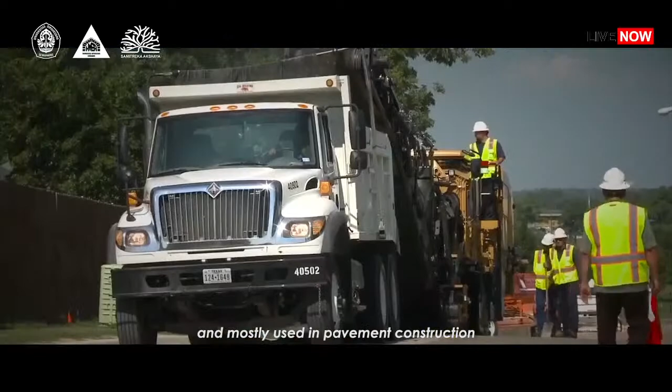Every industry has been touched by COVID-19 impact. This pandemic being challenged especially while constructing. As we know, asphalt closely related with construction industry and mostly used in pavement construction. Currently, there's a lot of technologies that we can take advantage of. The asphalt using in pavement construction has a lot of innovation and development to have less of an impact on environment.

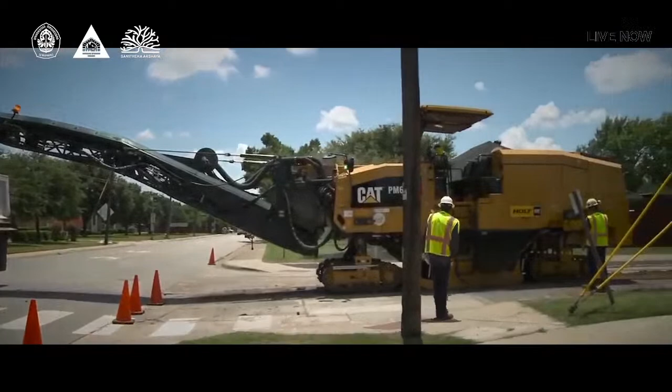To learn from you, Dr. Izzi. In fact, I would like to apologize as well because I can only stay for about 1.5 hours and then I leave because I need to attend an event later on. So I may disappear earlier before the end. How are you over there?

Alhamdulillah, everything's fine here. Okay, Madam Rita Susanti, can you hear us? Or can you check your audio? Okay, hello, Mr. Hasan. Yes. Selamat petang, Dr. Yusuf, Dr. Izzi.

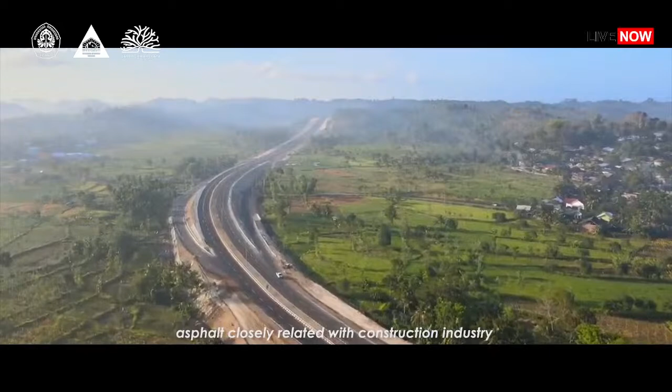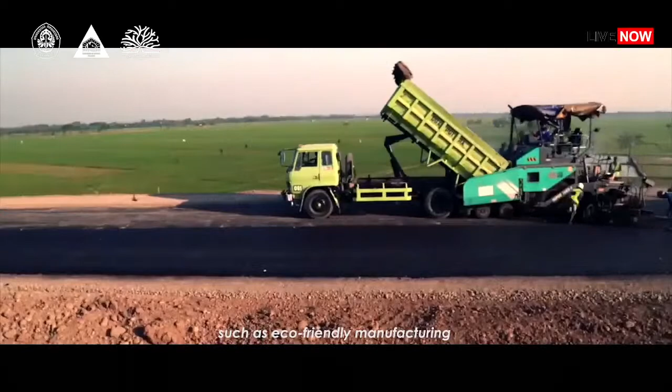Good morning. Every industry has been touched by COVID-19 impact. This pandemic being challenged especially while constructing. As we know, asphalt closely related with construction industry and mostly used in pavement construction. Currently, there's a lot of technologies that we can take advantage of. The asphalt using in pavement construction has a lot of innovation and development such as eco-friendly manufacturing, which being developed to have less of an impact on environment.

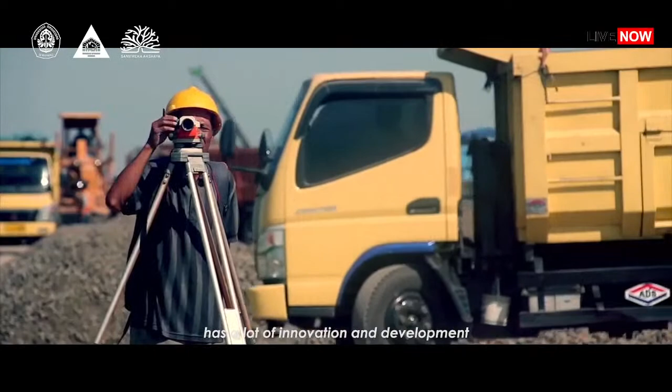Every industry has been touched by COVID-19 impact. This pandemic being challenged especially while constructing. As we know, asphalt closely related with construction industry and mostly used in pavement construction.

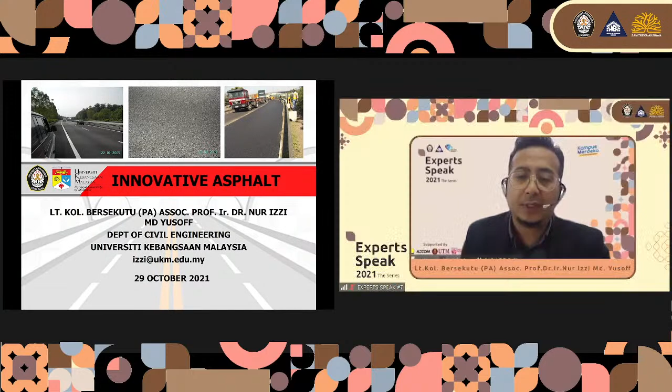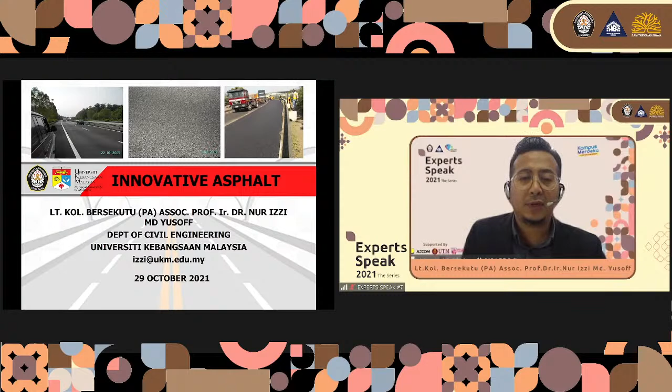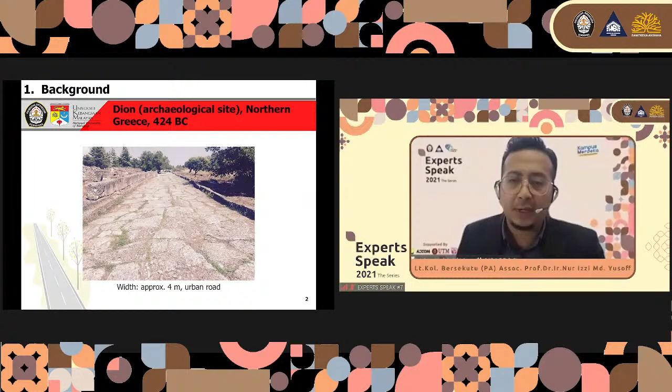Next, we also have another ancient road called the Via Egnatia, a road constructed by the Romans in the 2nd century BC.

It crossed Illyricum, Macedonia, and Thracia, running through territory that is now part of modern Albania, North Macedonia, Greece, and European Turkey as a continuation of the Via Appia. Like other major Roman roads, it was about 3 meters wide in rural areas and 5 meters wide near cities or urban areas. This road is paved with large polygonal stone slabs or covered with a hard layer of sand.

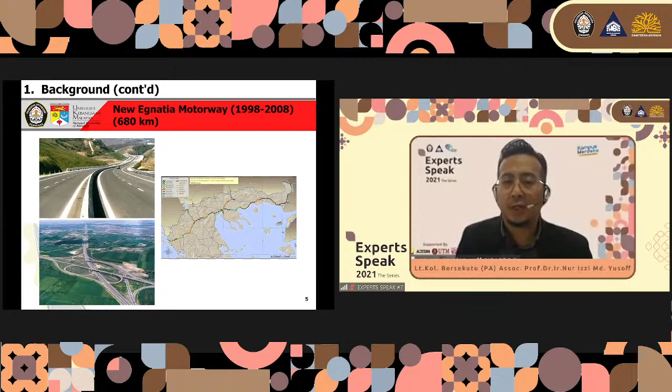Okay, this is also some basic information about the typical pavement cross sections. Basically, we have 3 types of pavements. The first one, we have the flexible pavement. Second one, we have the rigid pavement. And the third one is a semi-rigid pavement. So normally the flexible pavement on the left side consists of 5 layers.

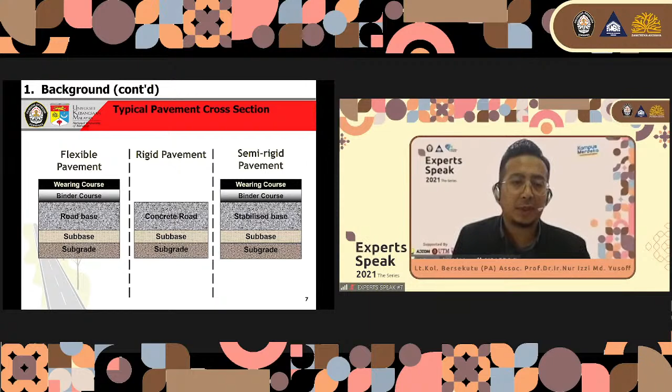Okay, what goes into the making of asphalt? Basically, asphalt is the umbrella term used in the American and European markets for a bituminous bound material. Asphalt is the shortened version of hot mix asphalt, or HMA. Asphalt, by definition, is a mixture of coarse and fine aggregates, binder or bitumen, and filler. In general, asphalt is used for constructing and maintaining roads, parking areas, railway tracks, ports, airport runways, bicycle lanes, sidewalks, and also play and sport areas.

Okay. Now I want to bring all of you to revisit, because due to the COVID-19 pandemic, some of us didn't get the opportunity to visit the premix production. Today, we're going to watch a video on the asphalt mixture of premix production at the hot mix asphalt plant. This video was originally taken at the premix plant at Bukit Tambun, Perak, in Malaysia. Let me share with you.

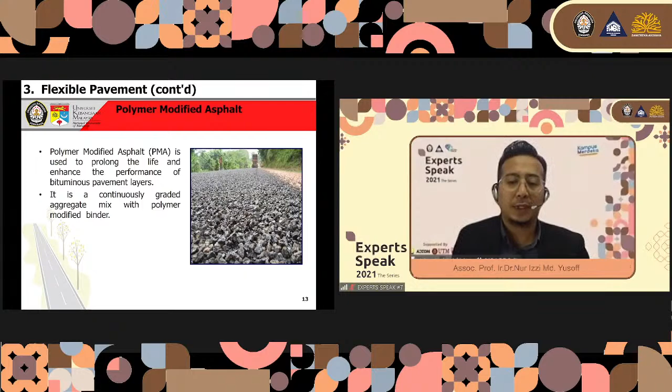These modifiers are used to reduce rutting and improve fatigue resistance and thermal resistance. Some advantages of using polymer modified asphalt: first, we can improve resistance to rutting or permanent deformation. Second, we can improve resistance to cracking due to binder hardening, improve resistance to fatigue cracking, and improve adhesion of binder to aggregate. PMA is also recommended for use on high stress areas such as climbing lanes or where excessive loads are expected.

Basically, in pavement study, we try to overcome three main problems. The first is rutting or permanent deformation at high temperature. The second is fatigue at intermediate temperature. And the last one is thermal cracking at low temperature.

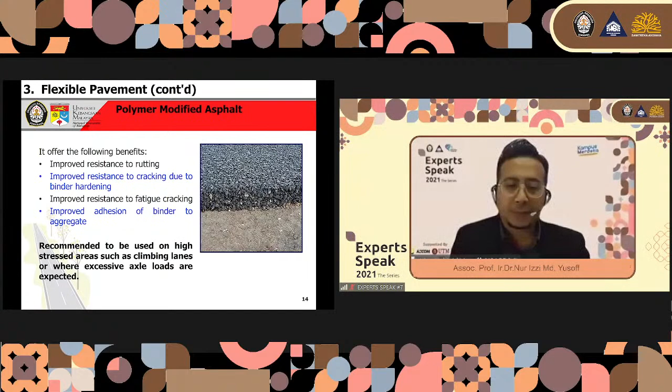The next one we have is asphalt concrete for thin layers (ACTL), around 30 to 40 millimeters, or asphalt concrete for very thin layers (ACVTL), 20 to 30 millimeters. This is an asphalt for surface courses with a thickness of 20 to 30 millimeters, in which the aggregate particles are generally gap-graded to form a stone-to-stone contact and provide an open surface texture. This mixture is often used in France and is called BBTM, Béton Bitumineux Très-Mince.

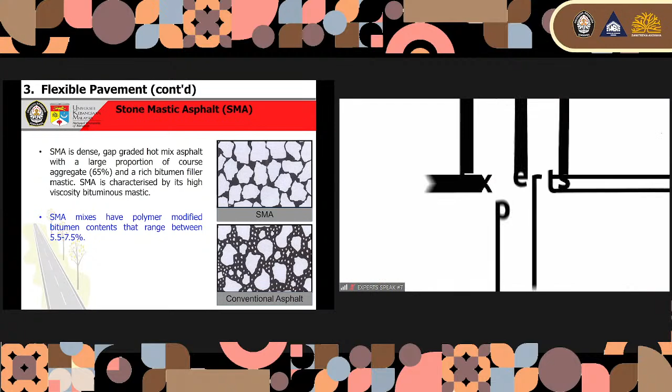The next one we have is stone mastic asphalt, or as referred to in other textbooks, stone matrix asphalt (SMA). SMA originated in Germany in the 1970s to provide maximum resistance to rutting caused by studded tires on European roads. It is a dense gap-graded hot mix asphalt with a large proportion of coarse aggregate, around 65%, and a rich bitumen filler mastic. SMA is characterized by its high viscosity bituminous mastic.

SMA mixes have polymer modified bitumens. Normally for stone mastic asphalt, we use polymer modified bitumen with contents ranging between 5.5 to 7.5%. The PMB may be further stabilized using cellulose fibers, to prevent excessive binder drain down. The presence of fiber enhances the durability of the SMA mix by allowing the use of higher bitumen content.

This SMA is able to provide durable surfacing and exhibit high resistance to rutting due to heavy axle loads. This type of surfacing also offers improved texture depth in the range of 0.7 to 1.0 millimeter and provides good skid resistance. This SMA mixture is recommended for use in high stress areas such as climbing lanes or where excessive axle loads are expected. However, SMA doesn't provide a permanent solution to diesel spillage problems, and due to relatively high cost compared to conventional asphalt, it shouldn't be used indiscriminately.

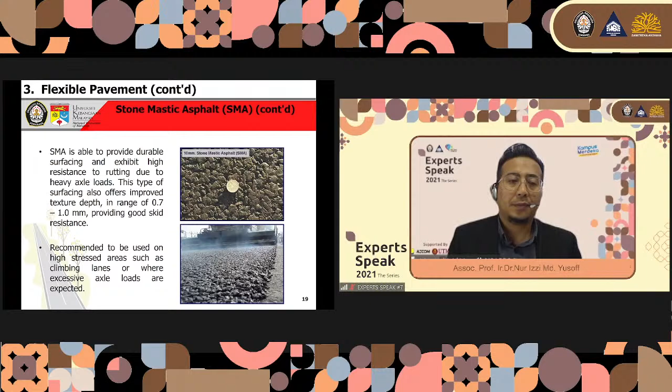Next we have ultra-thin layer asphalt concrete, UTLAC, sometimes also called asphalt ultra-thin layer, AUTL. UTLAC is a hot mix asphalt road surface course laid on a bonding layer at a nominal thickness between 10 millimeter and 20 millimeter, with properties suitable to its intended use. The method of bonding is an essential part of the process, and the final product is a combination of the bonding system and the bituminous mixture. UTLAC is a mixture in which the aggregate particles are generally gap-graded to form stone-to-stone contact and to provide an open surface texture, similar to the previous one.

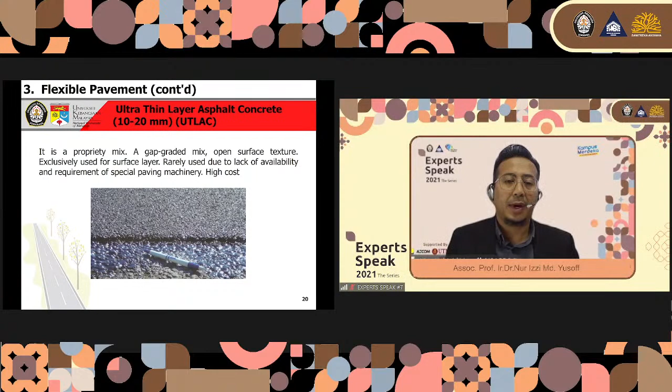Several varieties of this layer are often used to provide a good noise-reducing surface layer. However, it is rarely used due to lack of availability and the requirement of special paving machinery. Thus, this pavement needs high cost. Next, we have porous asphalt.

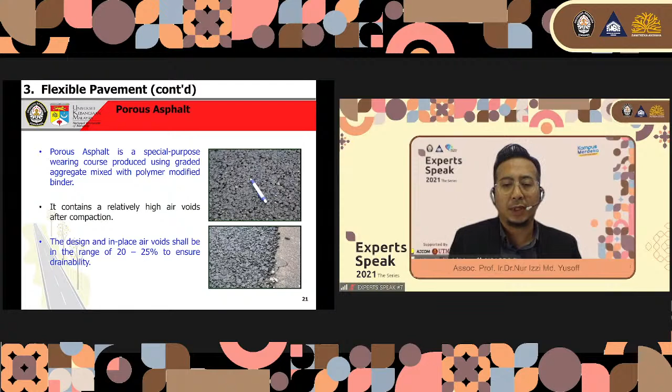So for this porous asphalt, there are some advantages. The first is improved skid resistance at high speed, especially during wet weather. It should reduce aquaplaning or hydroplaning effect, reduce splash and spray effect, reduce headlight reflection and glare on wetness, and reduce rolling tire noise level. When we drive on this porous asphalt, it is quieter compared to the normal conventional asphalt mixture.

This porous asphalt shouldn't be laid in areas where the pavement structure strength is substandard, or where excessive deposits of debris, oil or fuel may be experienced. Normally, the biggest problem of using porous asphalt is the clogging problem, where it will become clogged, so whenever we use porous asphalt, we need regular maintenance. Free drainage cannot be accommodated along the road shoulder for lengths of road less than 100 meters, because of spray carry-over from adjacent surfacing, and reduction in spray or noise level is only achieved at high speed.

Porous asphalt is recommended for highways and federal roads with hydroplaning problems. Next, we have double layer porous asphalt, 2LPA. The previous one was just a single layer, but this one has another layer, called double layer porous asphalt, or in the Netherlands this product is called twin lay. For double layer porous asphalt, the top layer has a grain size of 4/8 millimeter and is about 25 millimeter thick, and the second or bottom layer is porous asphalt with coarse aggregate of 11/16, which I was told is the sieve size used in the Netherlands. The total thickness is about 70 millimeter.

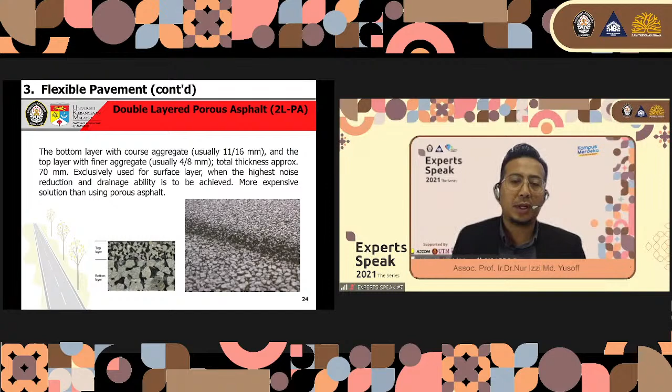However, it is a more expensive solution compared to the normal porous asphalt. The next one, I think Dr. Iswandaru is very familiar with this, hot rolled asphalt, HRA.

It is a gap-graded bituminous mixture in which the mortar of fine aggregate, filler, and high viscosity binder are major contributors to the performance of the laid material. Coated chippings, normally single-size aggregate particles with a high resistance to polishing, which are lightly coated with high viscosity binder, are always rolled into and form part of a hot rolled asphalt surface course.

This durable surface layer was often used as a surface layer in the UK. Hot rolled asphalt HRA takes the form of the bituminous bound mortar, consists of fine aggregate, filler, sand, and a high percentage by weight bitumen content of approximately 8%.

So this one is quite high. Normally for the normal asphalt, we use approximately 5% of bitumen or asphalt, but in this case, it uses around 8%.

Pre-coated high PSV, polished stone value, chippings are spread over the top of this bituminous mortar in a separate process using a chipping spreader, then rolled into the layer using a steel barrel roller, forming the finished hot rolled asphalt surface. However, this HRA is quite expensive compared to normal asphalt concrete due to the high percentage of binder used. The next one, we have mastic asphalt.

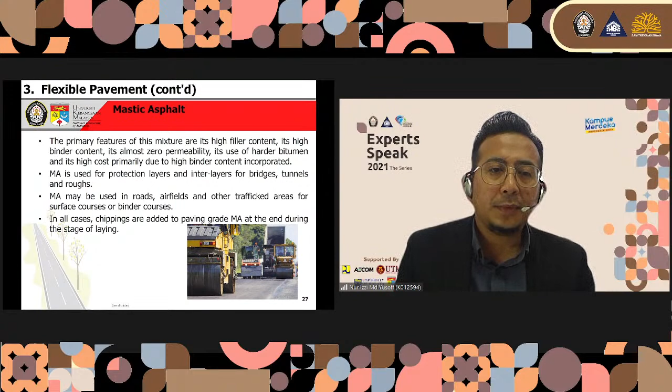And then the next one, we have color asphalt or color surfacing. It's a treatment with a specific color on the wearing course and may be used to differentiate the various elements. It may be used to improve traffic flow and traffic safety. It is a resin-based surfacing with anti-skidding properties. It consists of a layer of epoxy and polyurethane mixture topped with fine aggregates.

It is produced either using drum mix or asphalt batch. Colors can normally be red or green. This is the normal color that we use for color asphalt, red or green, but other colors are also available these days. The application of color surfacing should be delayed for at least 28 days for newly paved surface due to the relatively fresh bitumen coating of the aggregates.

This would cause poor adhesion between the color surfacing material and the pavement surface, which may result in cracking and peeling of the material.

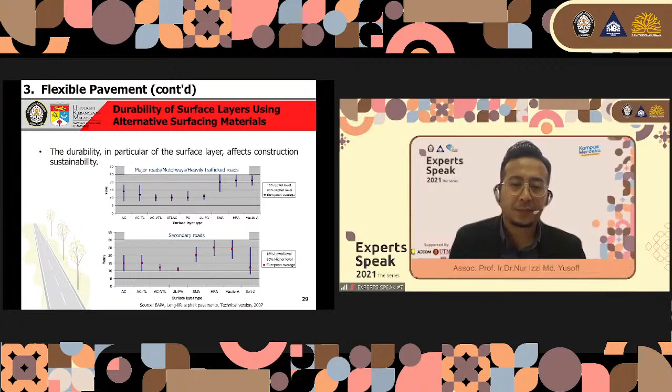And the next one, we have the current technology that we call warm mix asphalt or half warm mix asphalt, WMA or HWMA. WMA is asphalt produced, handled, and compacted at temperatures lower than those of conventional hot asphalt. So basically, when we pave the road with normal hot mix asphalt, you can see the smoke coming from the material. But when we use warm or half warm mix asphalt, you cannot see the smoke. So this one is more environmentally friendly as compared to the conventional asphalt mixture.

This is achieved by lowering the viscosity. We reduce the viscosity of the binder using several techniques. The first one, we use additives. There are various types of additives available in the market these days. These additives can be either organic or chemical, or we can use the foaming process, foam bitumen. We use a bitumen emulsion-based process or modification of the binder aggregate mixing process, all known as WMA systems. The aggregate mix gradation is the same as for normal hot mix asphalt.

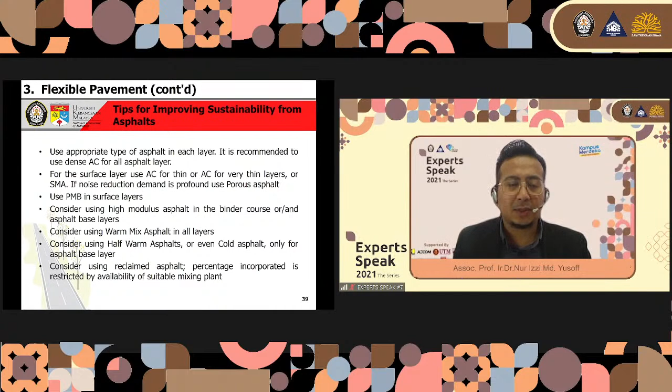And then I want to touch a bit on perpetual pavement, because this is very important these days: long life pavement. The term LLP is used by the Europeans. And we have another term, perpetual asphalt pavement, PP or PAP, coined by the Americans.

So a long life pavement is a type of pavement where no significant deterioration will develop in the foundation or road base layers, provided the correct surface maintenance is carried out. And an asphalt pavement designed and built to last longer than 50 years without requiring major structural rehabilitation or reconstruction, needing only periodic surface renewal in response to distress confined to the top of the pavement. At the end of the day, in both definitions, one should always consider environmental and social impacts.

So these are some of the benefits when we use perpetual asphalt pavement. Low life cycle costs by avoiding deep pavement repairs or reconstruction, lower user delay costs since maintenance or rehabilitation works require less time, hence a shorter period of traffic disruption, and lower environmental impact since less material is required over the pavement lifetime and recycling may be applied.

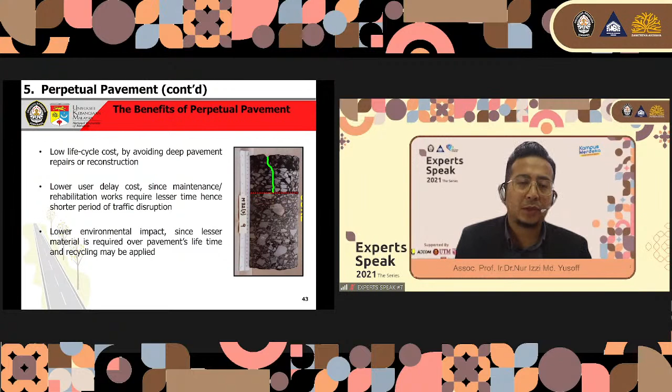And this is also one of the quite interesting studies in pavement technology: cool pavement technologies. Basically, cool pavement technologies can be divided into three types. First, we use reflective pavements to reduce the urban heat island effect. Second, we have evaporative pavement, where, as I mentioned before, water will seep through to the lower layer. And third, we have heat storage modified pavements, something like energy harvesting pavements.

Reflective pavements and evaporative pavements. These two methods are widely researched, studied and applied cool pavement technologies, whereas the heat storage modified pavement is researched but rarely applied, I think because the cost is quite expensive compared to the first two methods.

So I think this is very interesting, and if you have time, you can refer to this reference. Actually, this is a very good review paper written by a group of researchers from India. The title is Emerging Technology, in the journal Construction and Building Materials, very recently.

Okay, so to conclude this presentation, to construct innovative or sustainable flexible pavement, first, the pavement must be durable and long-lasting. So life expectancy should be more than 40 years. Normally, when we talk about flexible pavement, we are talking about a maximum design life of 20 years. But this one, we are talking of more than 40 years.